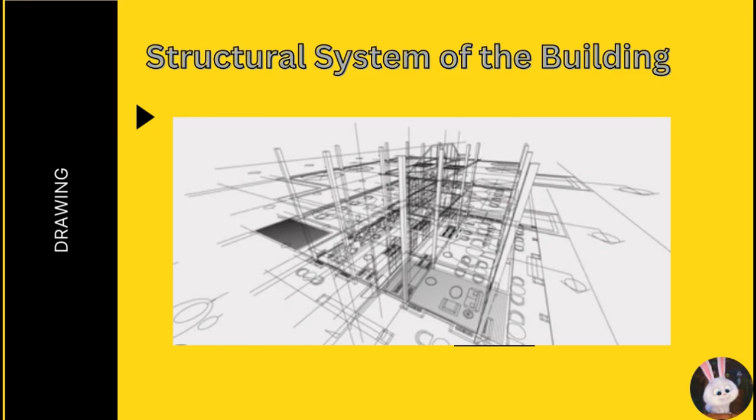This is a drawing that shows the structural system of the building. This figure shows what the structural elements are, such as column, slab, beam, or foundation.

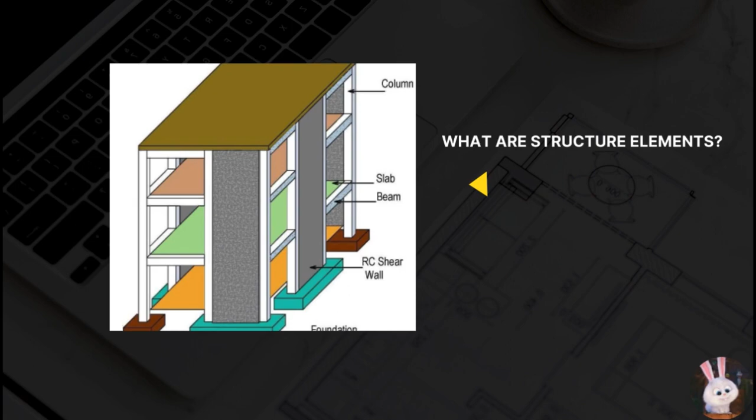Foundation is the base of a structure that rests on the ground and transfers load from the building to the soil. The foundation must be designed to support the weight of the building as well as resist external forces such as wind and earthquake. There are various types of foundations such as shallow foundation, deep foundation, and pile foundation.

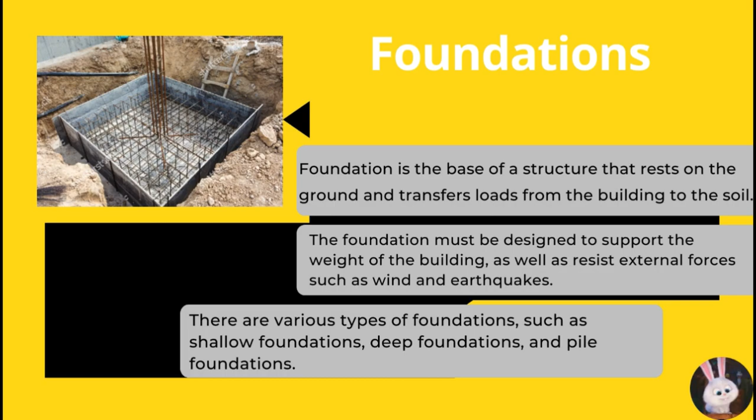This is what a structural element is. Structural elements are the basic building blocks of a structure that give it stability, strength, and support. These elements are designed to transfer load from the upper level of the building to the foundation, while providing stability and resisting external forces such as wind, earthquake, and other natural disasters.

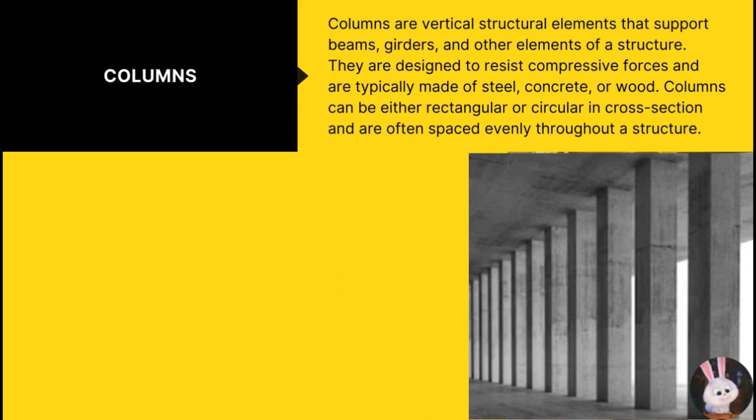The primary structural elements in a building are the foundation, slab, and column or beams. This is a column. A column is the vertical structural element that supports beams, girders, and other elements of a structure. They are designed to resist compressive forces and are typically made of steel, concrete, or wood. Columns can be either rectangular or circular in cross section and are often spaced evenly throughout the structure.

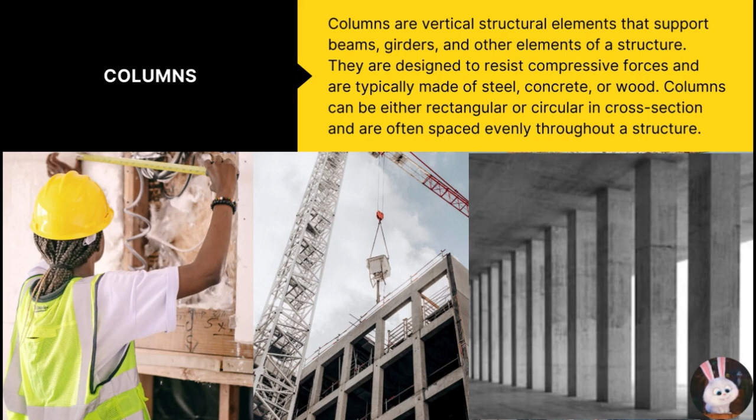Beams are horizontal structural elements that span between columns, girders, or walls. They support the weight of the structure above and are typically made of steel, concrete, or wood. Beams can be either solid or hollow and are usually rectangular in cross section.

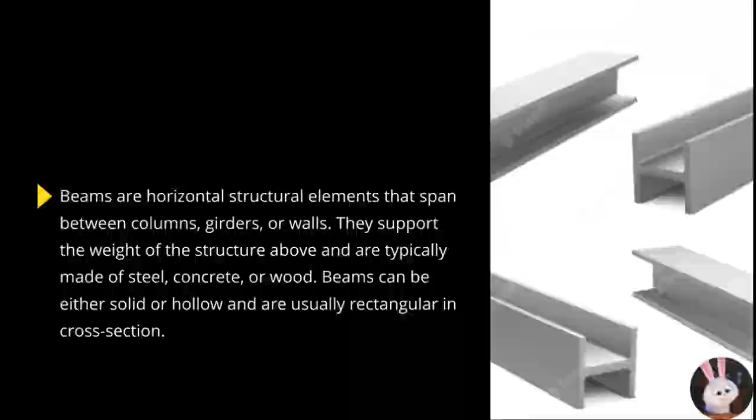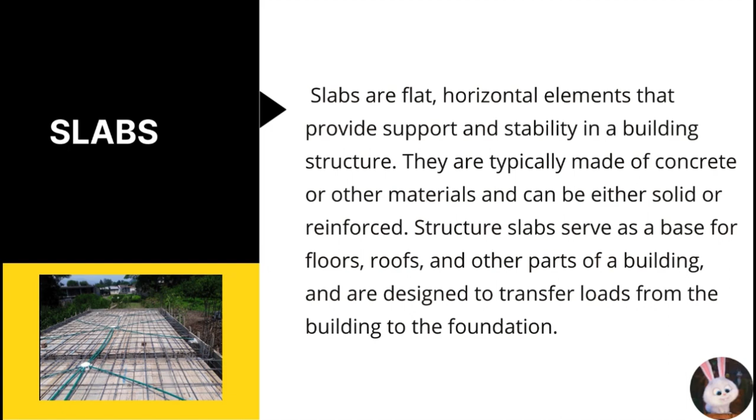Lastly is about slab. A slab is a flat horizontal element that provides support and stability in a building structure. They are typically made of concrete or other materials that can be either solid or reinforced. Structural slabs serve as a base for floors, roofs, and other parts of buildings, designed to transfer load from the building to the foundation too.

Now I'm going to talk about transportation and geotechnical engineering. Transportation engineering is a branch of civil engineering that involves planning, design, construction, maintenance, and operation of transportation facilities. The primary goal is to ensure the safety, efficiency, and sustainable movement of people and goods from one place to another.

The second one is traffic engineering. Traffic engineering focuses on the design and management of traffic flow so that traffic will move smoothly and prevent traffic jams.

The third one is highway engineering. They deal with designing and constructing the highway so that they can ensure vehicles on the highway can move in a very safe condition.

The fourth one is public transportation. They are involved in planning for public transportation so that there are enough shuttle buses or trains, making the movement of people very efficient.

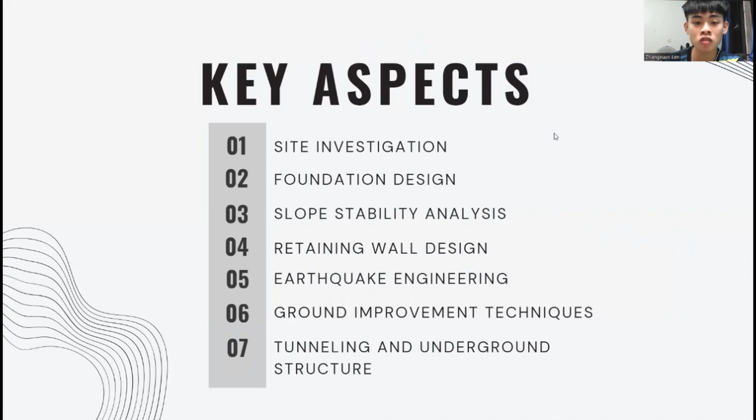The second one is foundation design. One of the critical roles of the geotechnical engineer is to design the foundation of the structure so that it is strong enough to support the infrastructure.

The third one is stability analysis. They should assess the stability of slopes, analyzing factors such as soil strength, groundwater conditions, and slope geometry to determine the potential risk of landslides and recommend appropriate stabilization measures.

The fourth one is retaining wall design. In situations where changes in elevation are necessary, such as in road construction, geotechnical engineers design retaining walls to support and stabilize the soil. The design takes into account the lateral earth pressure exerted on the wall and ensures stability against potential failure.

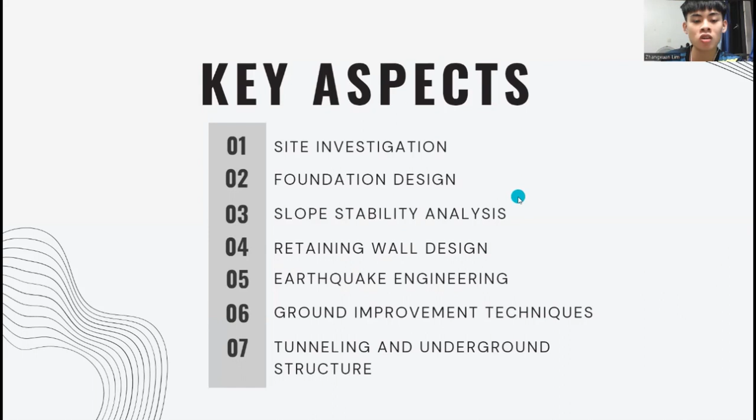The sixth one is ground improvement techniques. In some cases, the engineering properties of soil may need to be modified to meet project requirements. The geotechnical engineer will recommend ground improvement techniques such as compaction, grouting, or soil reinforcement to make sure the soil is stable enough and has sufficient strength for construction.

The last one is tunneling and underground structures. Geotechnical engineers are involved in the design and construction of tunnels, assessing soil and rock conditions to determine appropriate tunneling methods and provide support systems for excavations.

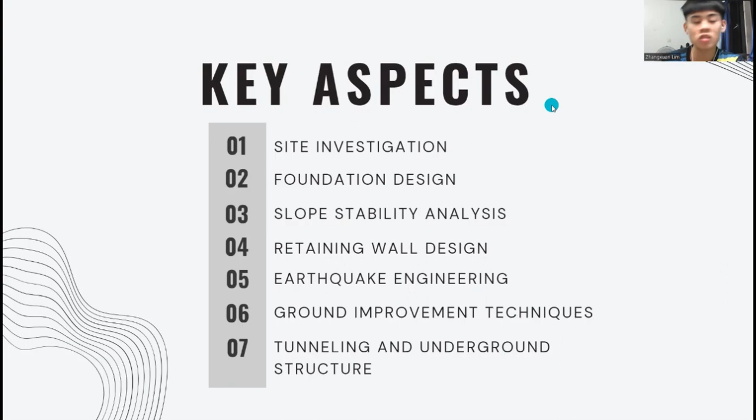Hydrology engineering involves the application of engineering principles to manage water resources, with a primary focus on the study of water movement, distribution, and behavior in the environment. This field plays a crucial role in addressing various water-related challenges, including floods, drought, water supply, and water quality.

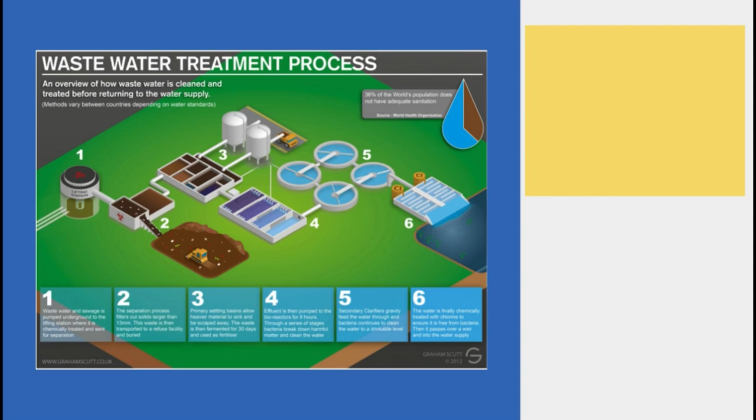This is the wastewater treatment process. Wastewater is any water that has been adversely affected in quality by human activities. This includes domestic, industrial, commercial, and agricultural activities.

Effective wastewater management is vital for several reasons. It helps to protect our water resources, prevent pollution, and ensure the health and well-being of both humans and the environment.

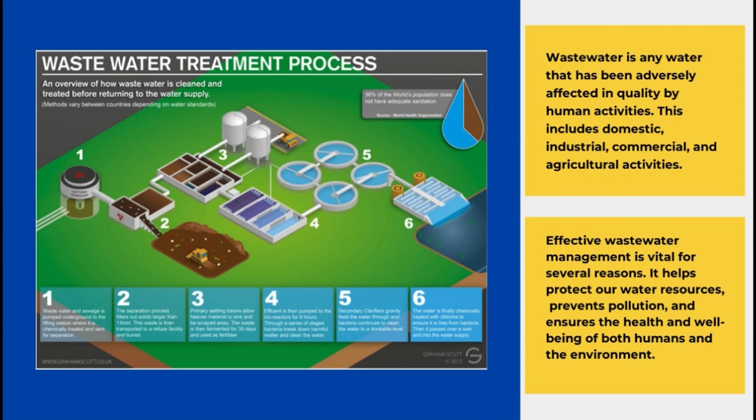Let's move to flood control. Floods occur when water exceeds normal levels, inundating land and properties. They can result from heavy rainfall, storm surges, rapid snowmelt, or a combination of these factors.

There are different types of flood control measures, including structural and non-structural approaches. Structural measures involve physical infrastructure like dams and levees, while non-structural measures focus on planning, land use, and early warning systems.

Dams and reservoirs are vital components of flood control. They regulate river flow, store excess water during heavy rainfall, and release it gradually to prevent downstream flooding.

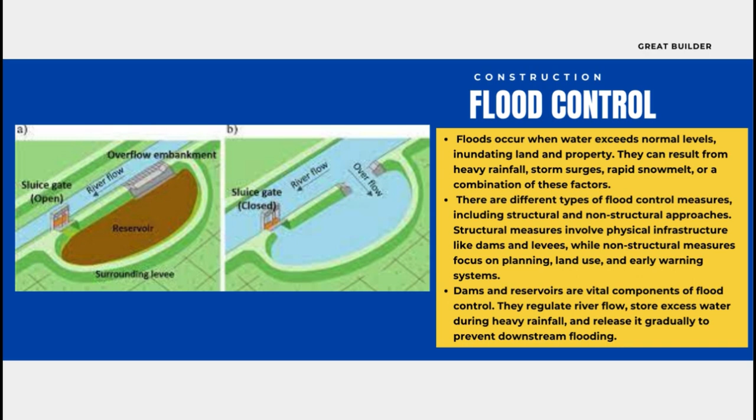Climate change refers to long-term changes in temperature, precipitation, and other atmospheric conditions on Earth. It is primarily driven by human activities such as burning of fossil fuels and deforestation.

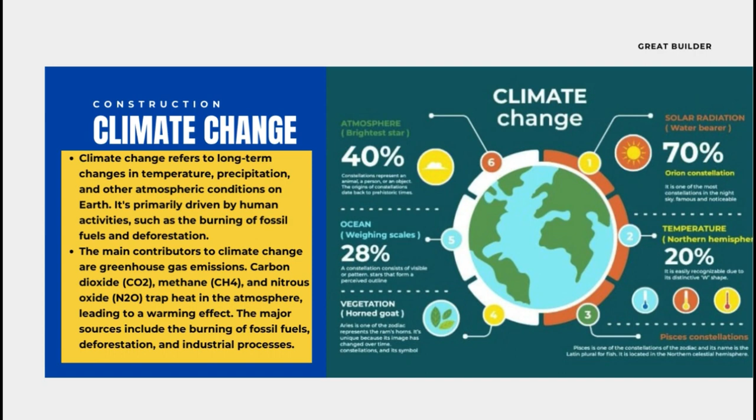The main contributors to climate change are greenhouse gas emissions. Carbon dioxide, methane, and nitrous oxide trap heat in the atmosphere, leading to a warming effect. The major sources include the burning of fossil fuels, deforestation, and industrial processes.

Lastly, the water cycle. The water cycle, also known as the hydrological cycle, is the continuous movement of water on, above, and below the surface of the Earth. It involves various processes that transform water between its liquid, gas, and solid states.

This is the key of the water cycle process. First, evaporation, the conversion of liquid water into water vapor due to heat from the sun. Second is condensation, the transformation of water vapor into tiny water droplets, forming clouds.

Third, precipitation, which is the release of moisture from clouds in the form of rain, snow, sleet, or hail. And lastly, runoff, the flow of water over the Earth's surface, collecting in rivers, lakes, and oceans.

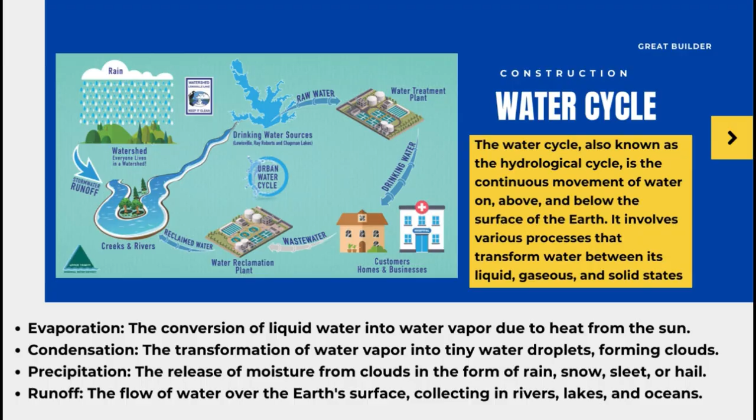So that's all from hydrology engineering. Now let's move to another part, which is environmental engineering.

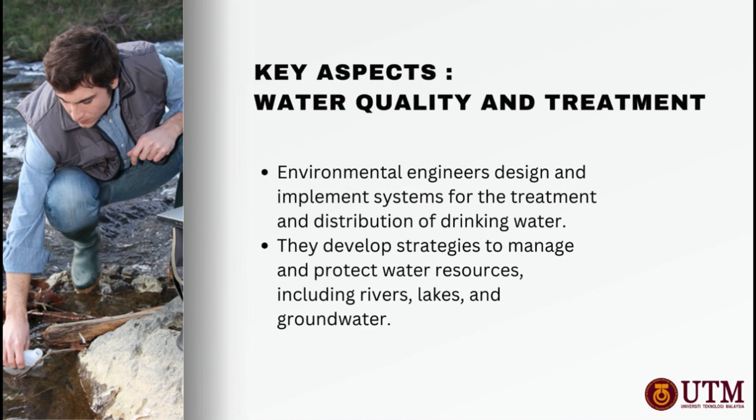Key aspect: water quality and treatment. Environmental engineers design and implement systems for the treatment and distribution of drinking water. They develop strategies to manage and protect water resources, including rivers, lakes, and groundwater.

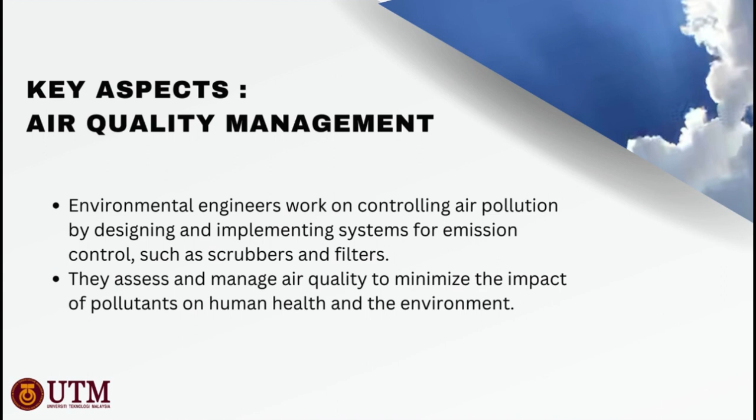Second key aspect: air quality management. Environmental engineers work on controlling air pollution by designing and implementing systems for emission control, such as scrubbers and filters. They assess and manage air quality to minimize the impact of pollutants on human health and the environment.

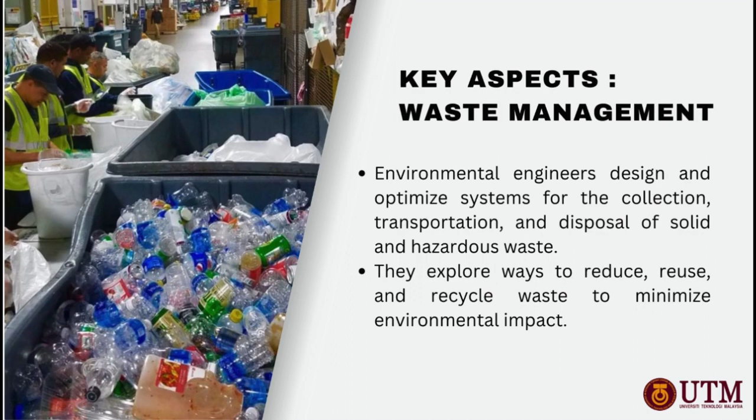Next, key aspect: waste management. Environmental engineers design and optimize systems for the collection, transportation, and disposal of solid and hazardous waste. They explore ways to reduce, reuse, and recycle waste to minimize environmental impact.

Key aspect: environmental monitoring. Engineers use monitoring tools and technologies to assess the environmental impact of various activities and to ensure compliance with regulations. They analyze data to understand trends and make informed decisions about it.

Now, let's talk about the importance of environmental engineering. The first thing is public health protection.

Next, water resource management, air quality improvement, waste management and recycling, sustainable development, biodiversity conservation, climate change mitigation, disaster preparedness and resilience, compliance with environmental regulations, research and innovation, ecosystem protection, resource conservation, pollution prevention, community resilience, educational outreach, and global environmental diplomacy.

Now I'll talk about Heriot-Watt University Malaysia, which was assigned to Group 7 from another section, and they shared with us about it. Heriot-Watt University Malaysia is an outstanding international branch campus, reflecting its parent institution's dedication to global education.

The campus's architectural brilliance, sustainable initiatives like Malaysia's first green roof, and use of advanced technologies showcase a forward-looking mindset, with a diverse environment, strong industry connections, and a commitment to academic excellence. The university equips students for success in today's fast-forward world.

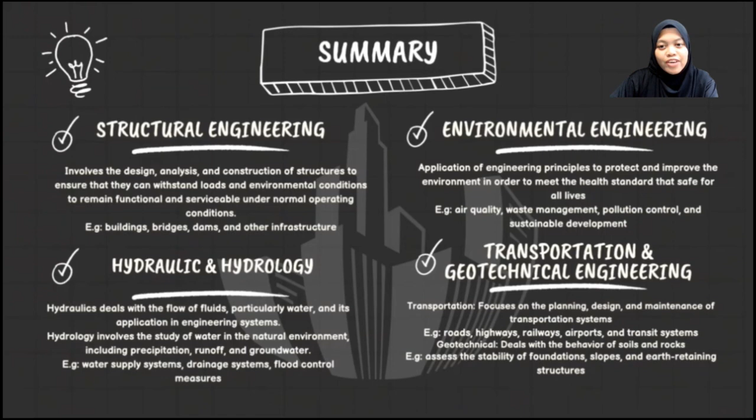As students of civil engineering, we are encouraged to understand all these 4 civil engineering disciplines so that we can communicate more effectively with colleagues and clients, facilitating teamwork while handling projects in the future.

For the bonus question, the problem chosen is air pollution. Generally, air pollution refers to man-made emissions that are released into the atmosphere. Air pollution is said to be dangerous because it gives huge consequences to humans and the environment.

For employees who work regularly on construction sites, there is an increased risk of them developing health complications such as cough, lung cancer, and asthma. Other than that, people who live nearby construction sites may also experience the effects of air pollution because the air pollutants are spread by wind to the surrounding area.

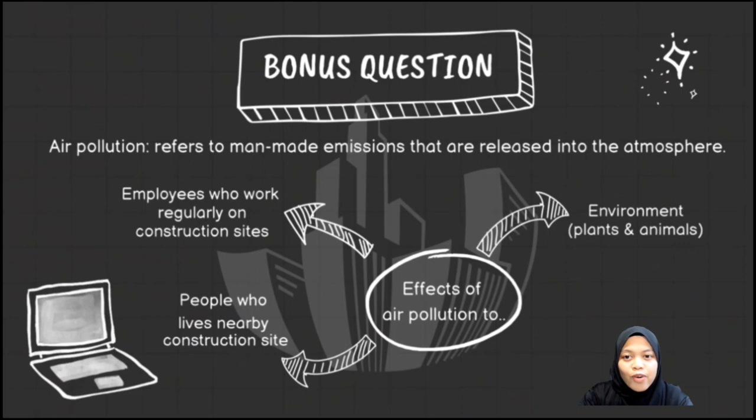As well as the consequences to human health, we also need to be aware of environmental health. Plants and animals struggle to thrive as a result of this contamination, which causes a loss of biodiversity. While construction activities can cause a significant amount of air pollution, there are fortunately some ways to reduce these impacts.

Number 1, water suppression systems. Implementing water spraying systems to control dust emissions at construction sites can help settle particulate matter and reduce its dispersion into the air.

Number 2, cover the material piles. Covering stockpiles of construction materials will prevent wind erosion and the release of particulate matter.

Number 3, enclosures and barriers. Erecting physical barriers or enclosures around construction activities contains dust. This can include temporary wind barriers and enclosing the construction zone with mesh or fabric.

Number 4, proper waste management. Implement proper waste management practices to reduce the generation of airborne particles. This includes covering and securing waste materials during transport.

And the last one, dust control chemicals. Use dust control additives or chemicals on exposed surfaces to suppress dust. These chemicals can help bind particles together, preventing them from becoming airborne.

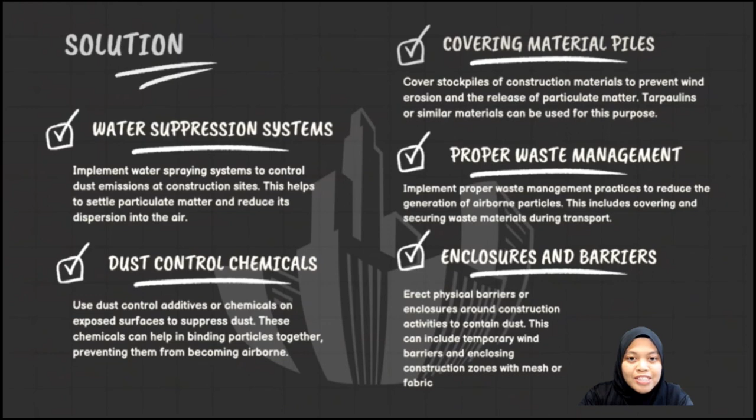However, many employers of construction companies still cannot afford all the technology meant to prevent air pollution at construction sites. Therefore, engineers are given wide exposure to knowledge of sustainability in order to solve the problem of air pollution in the future. That's all from us. Thank you.